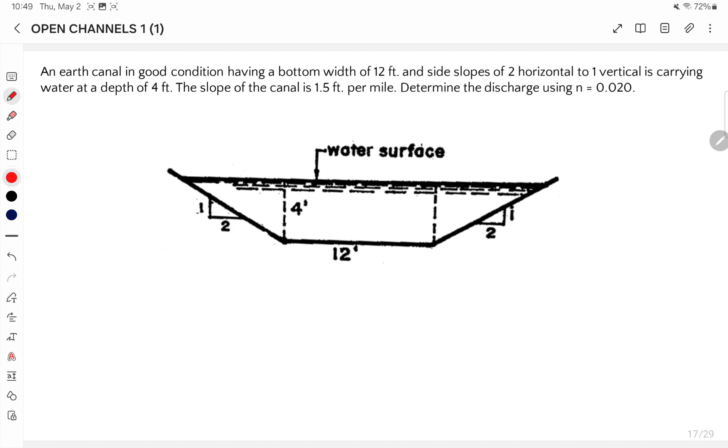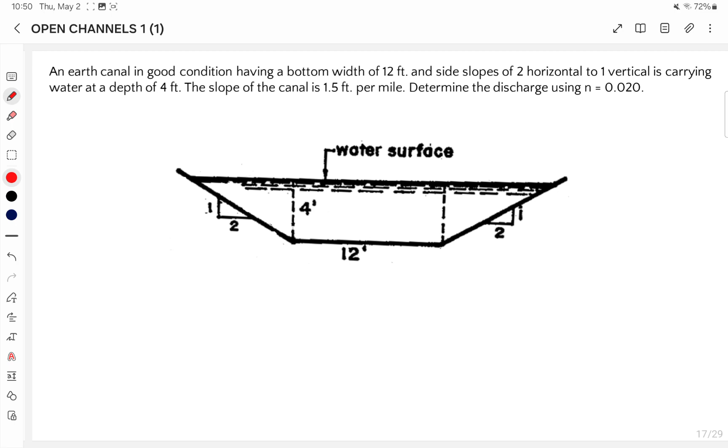Final problem for the open channels. An earth canal in good condition has a bottom width of 12 feet and side slopes of 2 horizontal to 1 vertical. This is the side slope being referred to - 2 horizontal, 1 vertical. It carries water to a depth of 4 feet. The slope of the canal is 1.5 feet per mile. Determine the discharge using N equal to 0.020.

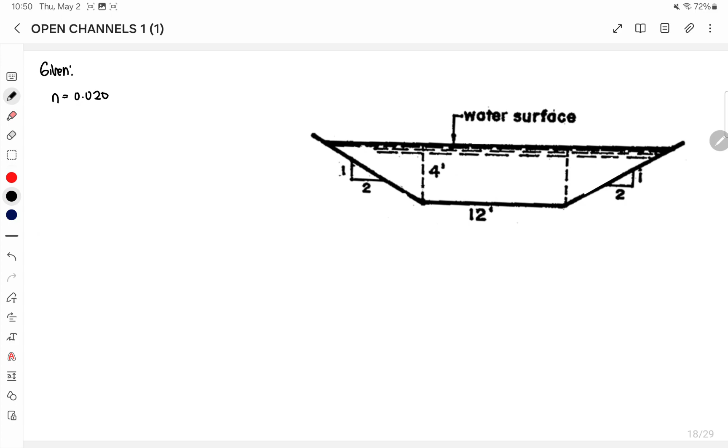First, we will put the given values for this problem. We already have a figure, so let's just place the given values: N equal to 0.020, and the value of slope would be 1.5 feet per mile. Since 1 mile is equivalent to 5280 feet, we put 5280 feet. So the slope is equal to 0.000284. You can just store it in your calculator.

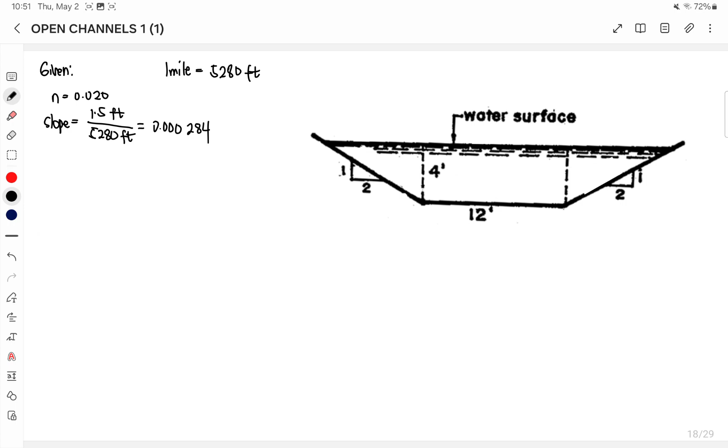Let's place the given values in the figure. We have a base of 12 feet. For the value of x, we use the side slope given to us, which is 1 horizontal to... first we have 1 here, then 2 horizontal. So for this horizontal, we multiply it by 2 to get this value - meaning if this is 4, this becomes 8 feet.

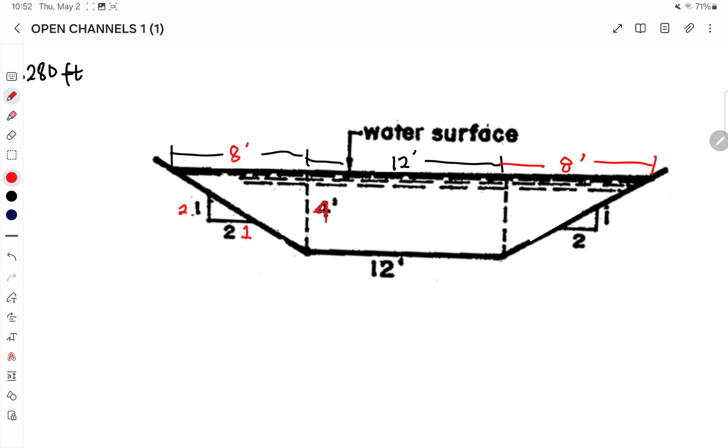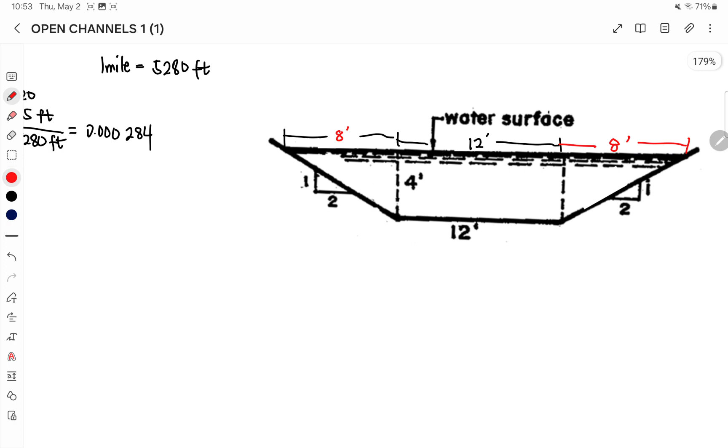For the value of this slope or side slope S, this is Pythagorean theorem. S equals the square root of 8 squared plus 4 squared, which is equal to 4 square root of 5.

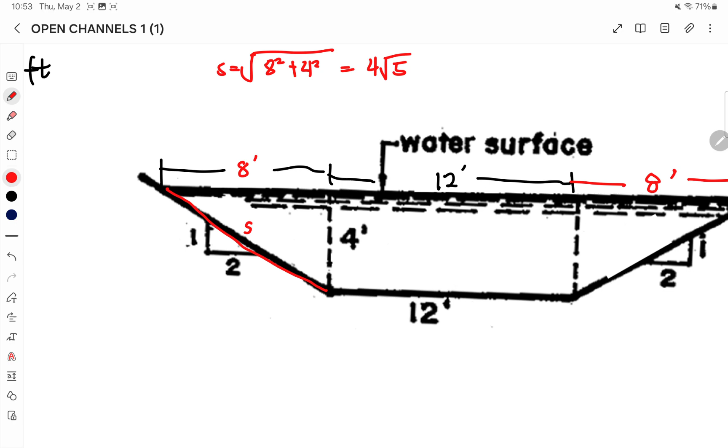First we will get the area: 1/2 base times depth. We have 12 plus 8 plus 8, that's 16, plus 12, we get 28 feet, times D which is 4. So the area is equal to: 12 plus 28 times 4, equals 160, divided by 2, equals 80 square feet.

For the wetted perimeter: 2S plus 12 plus S again - so 2S plus 12, where S is 4 square root of 5 plus 12. This will be equal to 29... let me double check. 29.89.

For the hydraulic radius, we have 80 over 29.89, which will be equal to 2.677.

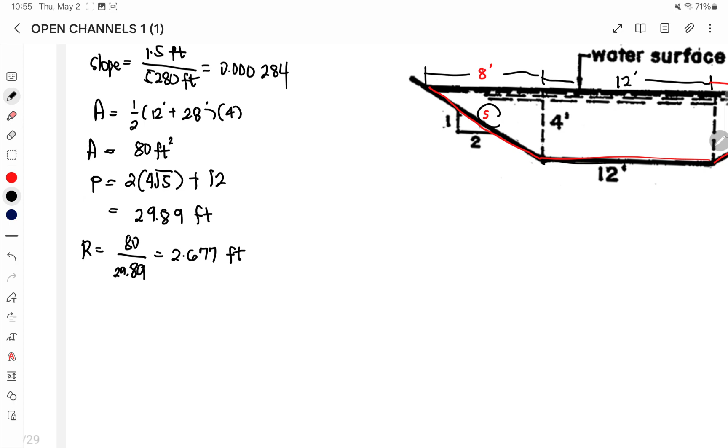For the value of V, we have 1.486 R^(2/3) S^(1/2) all over N. So 1.486, R is equivalent to 2.677, then S is 0.000284 - don't forget the 1/2 exponent. Then N is 0.02. So the value of velocity here is equal to 2.414 feet per second, FPS.

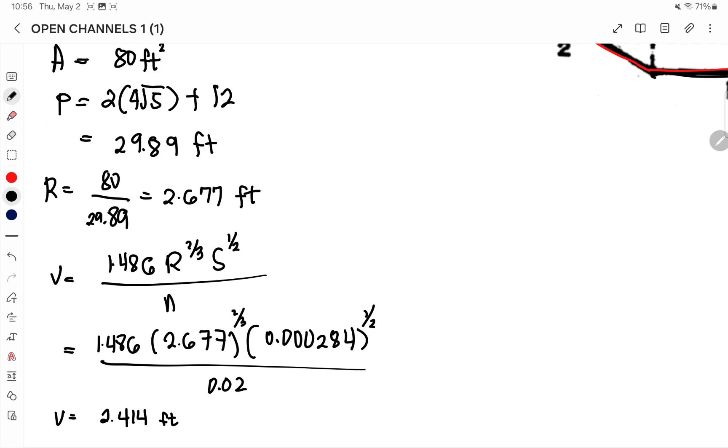What we're looking for is the discharge. For the value of Q, we have A times V. Our area is 80 and the velocity is 2.414. So the discharge is equal to 193.1 cubic feet per second. Final answer.

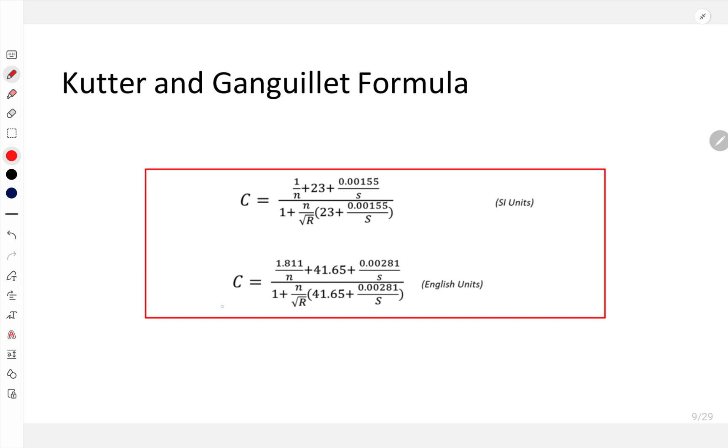We just need to solve these: 1.811, we have N of 0.02, plus 41.65 plus 0.00281 S which we already computed, all over 1 plus N, which is 0.02, over the square root of R, wherein R is 2.677 from our previous computation, times the value 41.65 plus 0.00281 all over S, which is 0.000284.

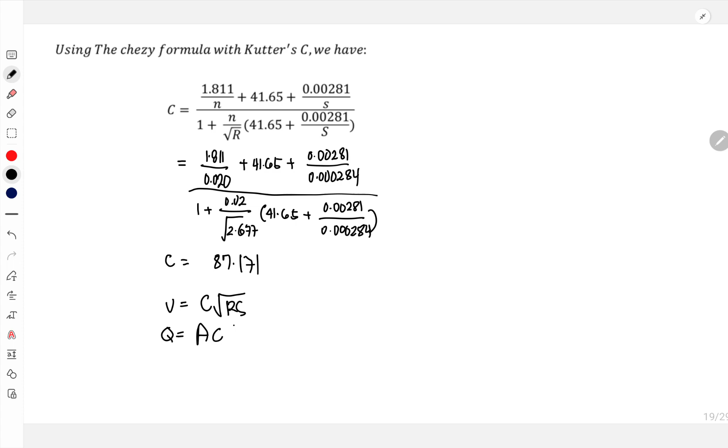Or for Q, we look at A and C. Now let's do this: for Q, we have 80 times C, 87.17, square root of R, 2.67, times the value of S, 0.000284.

So the value here will be equal to 87 times square root of 2.677 times 0.000284, giving us 192.28 cubic feet per second.

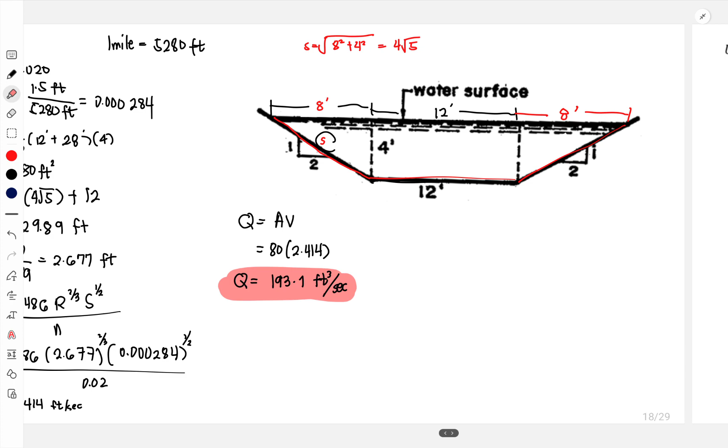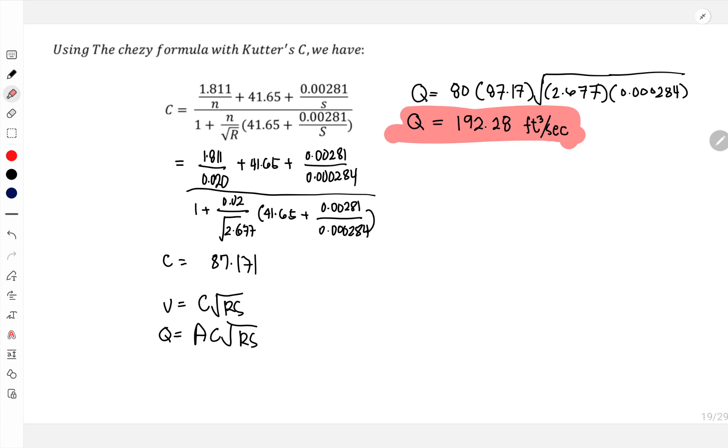So screenshot this - number 1 using Manning's, and then using the Chezy formula.